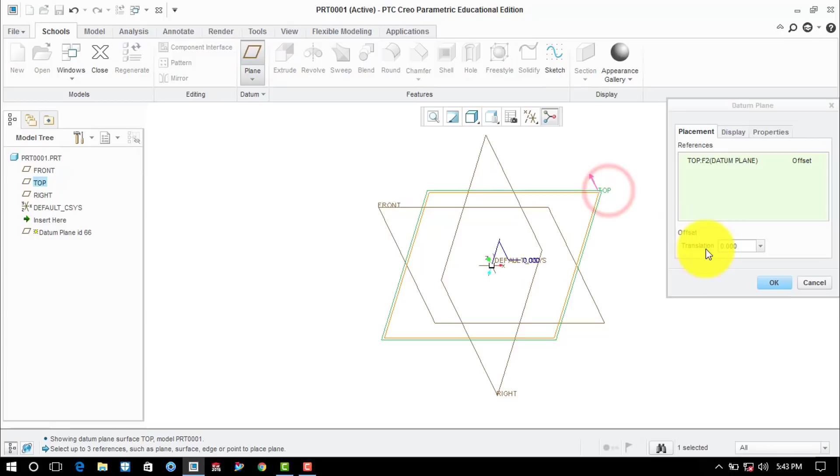Now before creating a part, we will first offset a plane parallel to the top plane and at a distance of 18 mm. So we'll go to the plane, then select the top plane and the distance is 18 mm and then click on OK. After making a plane, we'll use the extrude. So go to the model and select the extrude. Now we'll draw two concentric circles. So click on the circle and draw two concentric circles with the origin as a center.

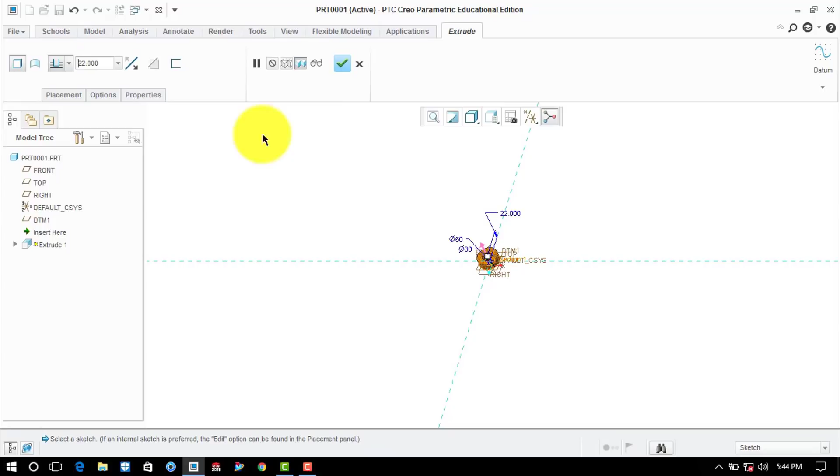And here the inner circle has a diameter of 30 mm and outer circle has a diameter of 60 mm. And then click on OK. Here the depth of the extrusion is 22 mm. So enter here 22 and then click on OK. After making this, we have to mirror it about the top plane. For that, click on the mirror and then select the top plane and then click on OK.

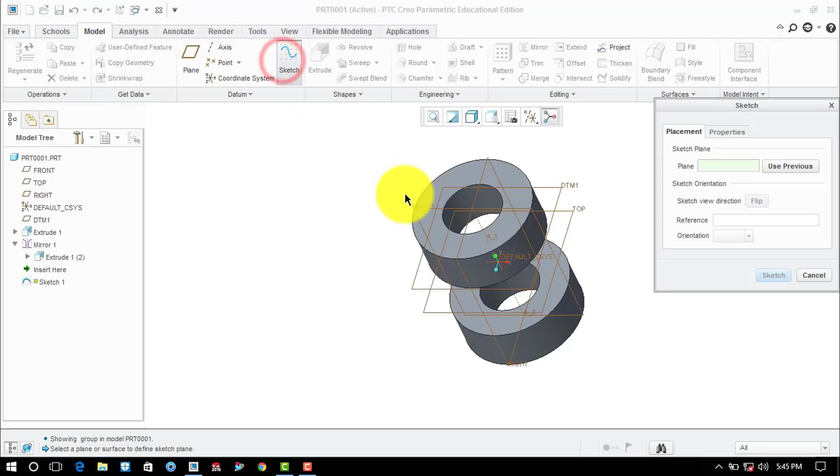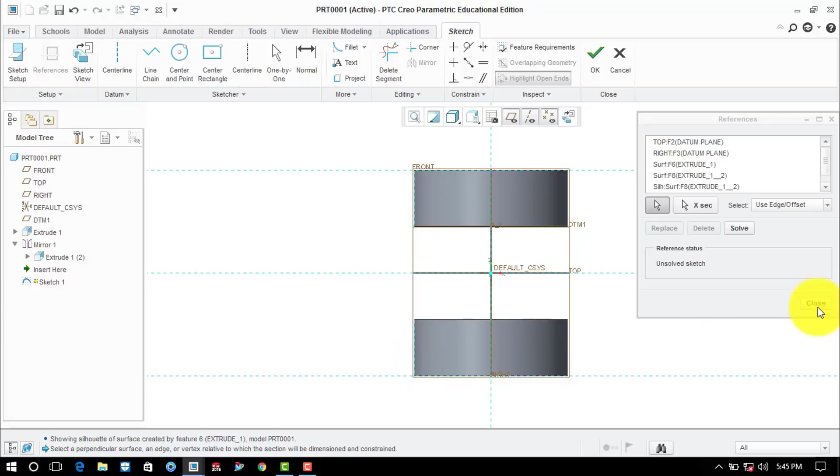After making this, we have to sketch a curve on the front plane about which we will sweep a cross section. For that, click on the sketch, then select here front plane and then sketch. Now here, before making the sketch, we will give the references to some edges. So click on the references, then click on the upper edge, then this lower edge and these two side edges. Then we will close it. Now we will make a circle such that it will be tangent to both the upper and lower reference line. So we have created this.

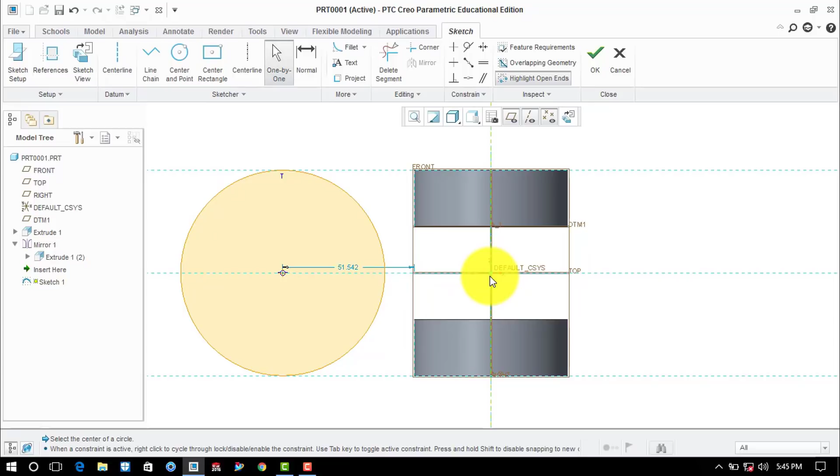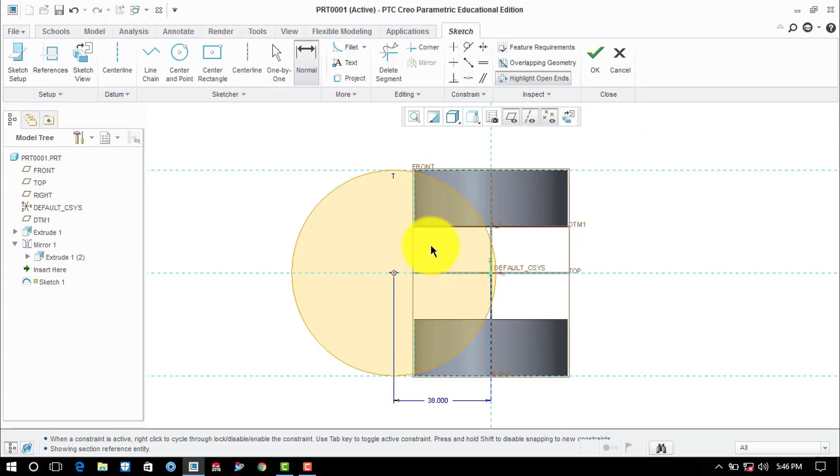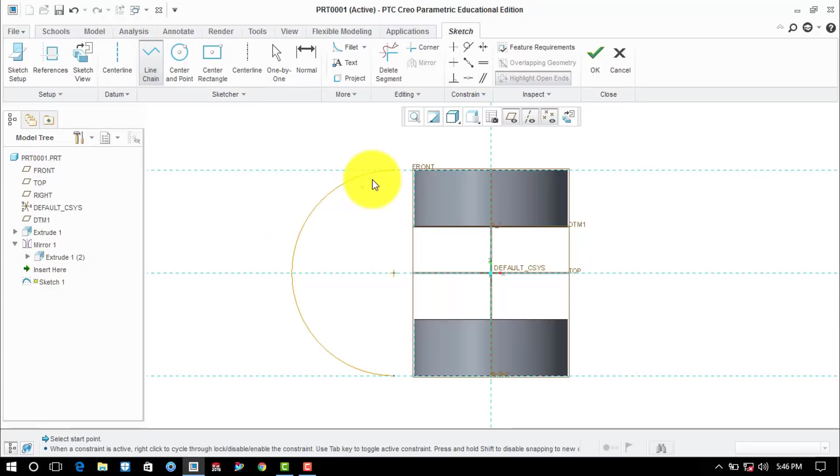Now the distance of the center of the circle from the origin is 38 mm. So we'll go to the normal, then click on the center of the circle, then press Ctrl, then click on the origin and then press the scroll button. Now this distance is 38 mm. Now after making this, we will trim unwanted segments. For that, we will use the delete segment and then we will delete all the unwanted segments. Now we will make two horizontal lines to complete the curve. For that, we will click on the line and then we will draw two horizontal lines and then we will click on OK.

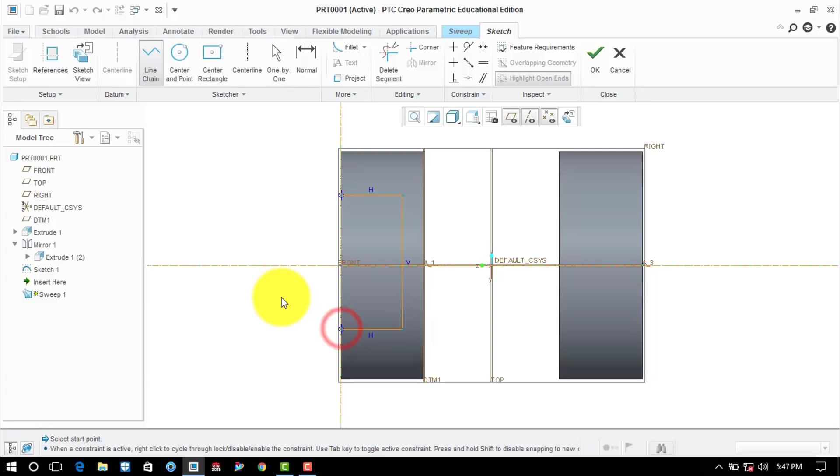Now we will click on the sweep and select the section. Now here we will draw a section which we want to sweep along the curve that we have drawn in the early sketch. So here we will draw a sketch using the line. Now here first we will draw an open rectangle. Now here this distance is 18 mm, the total distance is 36 mm and here it is 22 mm. Now we will close it by a line and then click on OK.

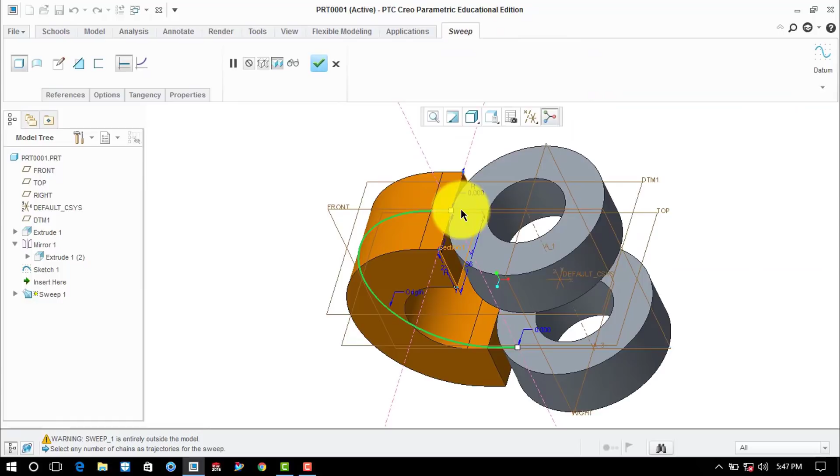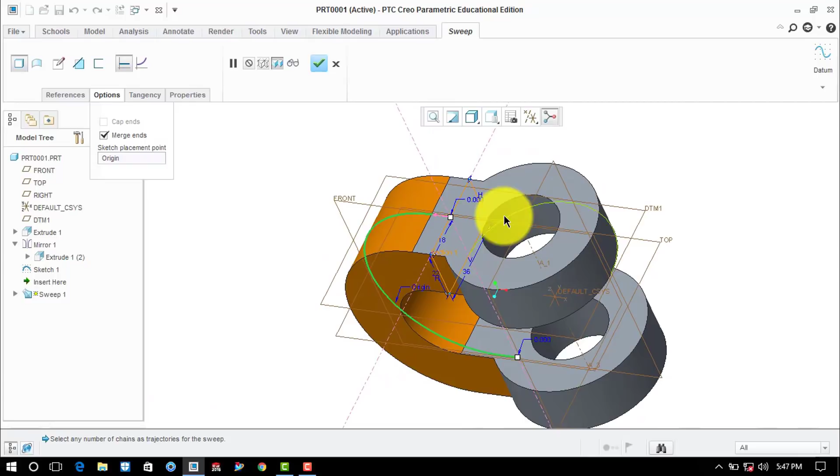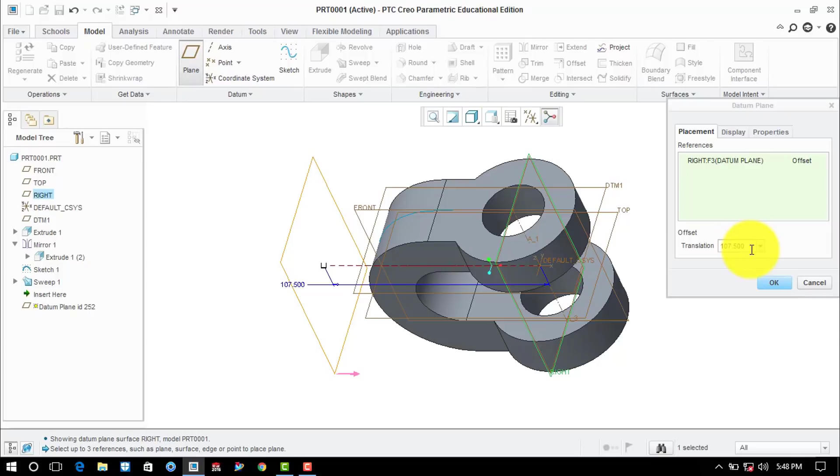So here you can see that there is some gap in between the early entity and the entity that we have made by the sweep. Now in order to remove these, we will go to the options and click on the merge ends. So here you can see that it is perfectly attached to the prior entity. Then click on OK. Now after that we will make a plane which is parallel to the right plane and at a distance of 107.5. So click on the plane, then select the right plane, and here the distance of this plane from the right plane is 107.5 mm. So enter here 107.5 and then click on OK.

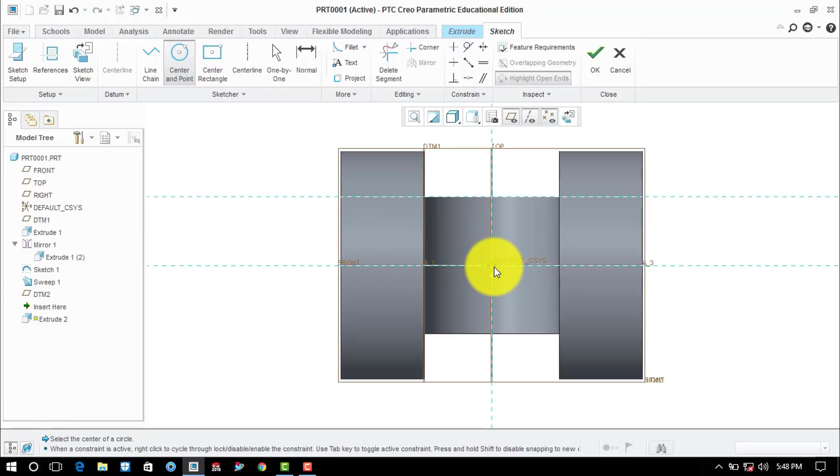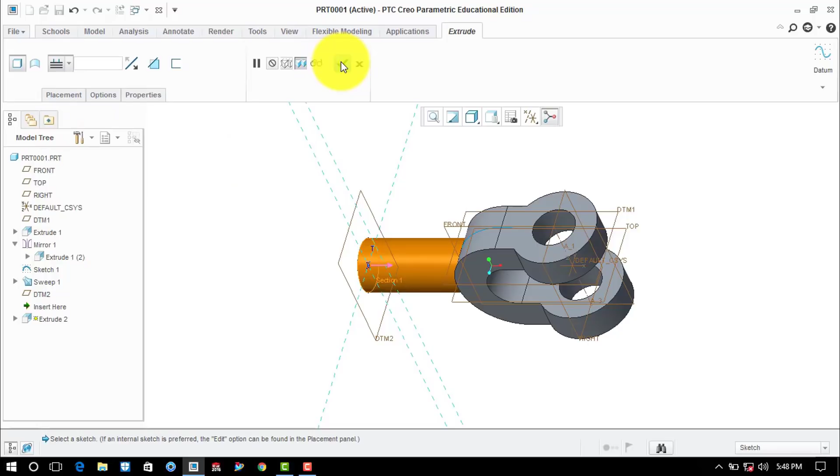After making a plane, we will select Extrude and then we will give the reference to this upper edge, then we will close it. Now we will draw a circle whose center lies on the origin and which is tangent to the reference geometry. Then we will close. Now here the depth of extrusion is up to this portion. So here in this drop down box we will select extrude up to the next surface and then we will click on OK.

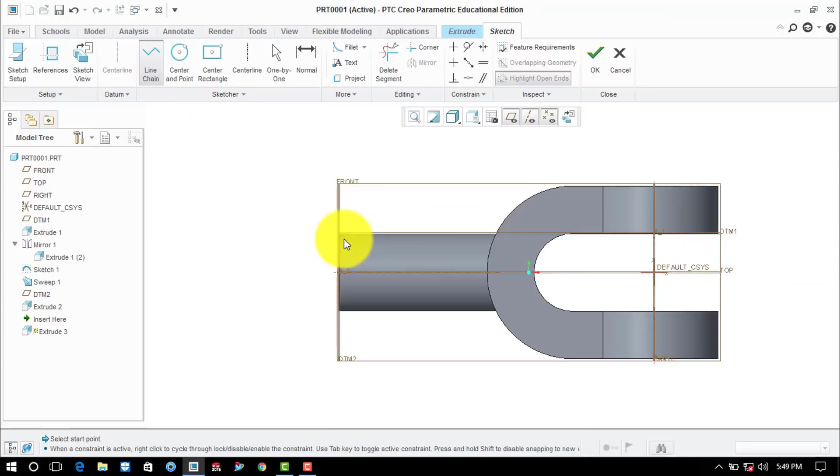Now after making this, we will click on the extrude and then we will select front plane. Now we will give the references to the upper edge and this side and then we will close it. Now we will draw a closed section using the line and circle. So first we will start from here and first we will draw a vertical line, then a horizontal line. Now the vertical line has a length of 2 mm, the horizontal line has a length of 38 mm, and now we will draw a circle.

So here we will click on the circle, then we will draw a circle. Now we will give the tangency to this circle to the horizontal line. So click on the tangency, then click on the circle and then click on the horizontal line. Here the distance of the center of the circle from the reference line is also 38 mm. So we will give it 38.

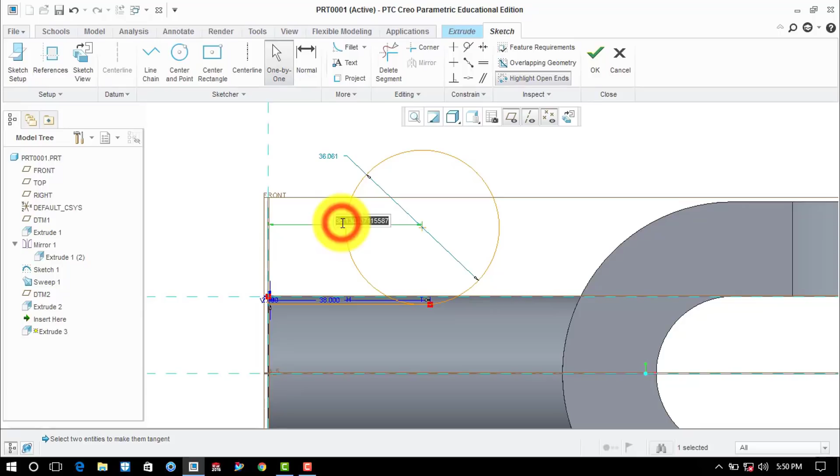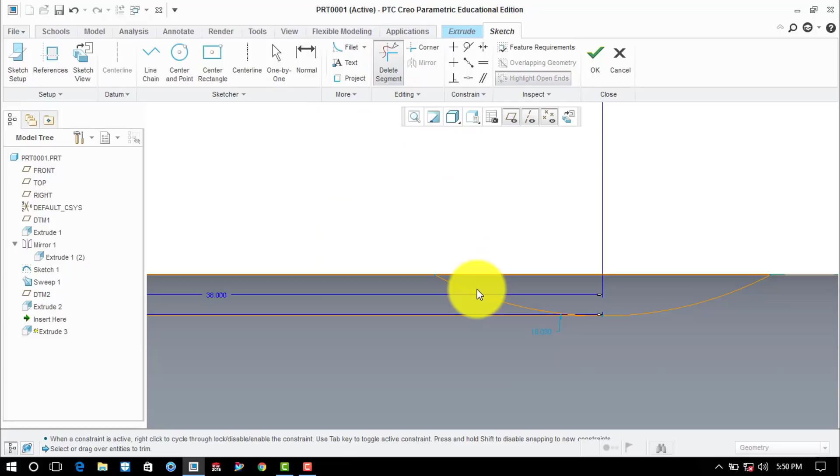Now we will draw a horizontal line in order to complete the section. So we will create a horizontal line like such. Now we will trim unwanted segments. So we will click on the delete segment and we will delete all the unwanted segments. Now here our sketch is completed and now we will click on OK.

Now here from the drop down list we have to select extrude on both the sides and then we will click on the remove material and then click on OK. Now we have to make a pattern of 6 such extrude cuts. So we will click on the pattern, then here we will select the axis pattern.

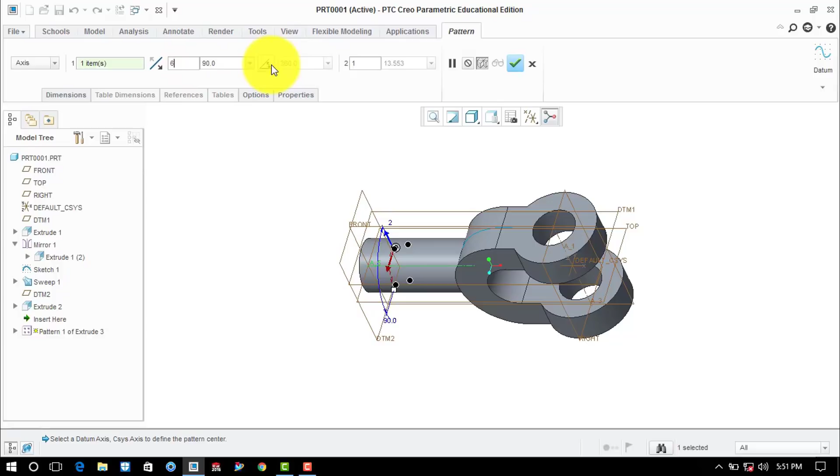Now here we have to choose the axis around which the pattern will be made. So here we will select this axis and here we have to give the number that we want to make the pattern. So here it is 6 and we will click on the 360 degree button, then click on OK. So here we have made successfully our first part, which is the fork, and now we will save it.

So go to the file, then click on the save as. Here you can see that it will be automatically saved to the folder that we have made using the working directory, which is the desktop and knuckle joint. Now here we will name it as a fork end, and then we will click on OK.

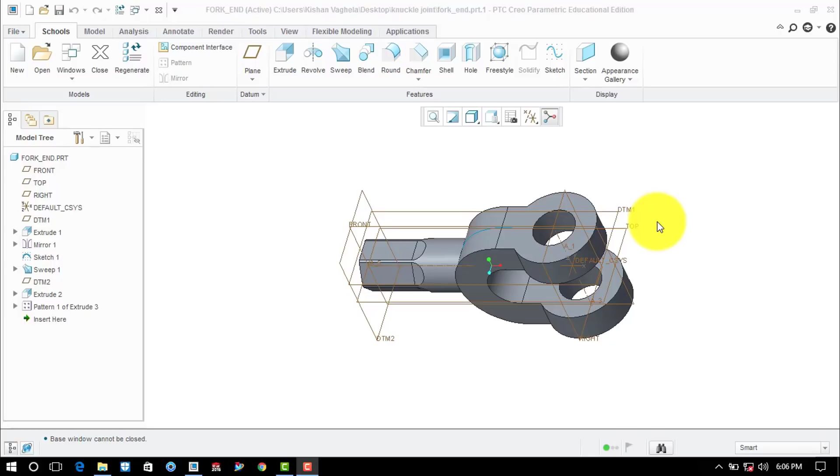Now we will close it and we will make the second part, which is the eye end. So we will close it and click on the new. Here we will uncheck this, click on OK, and here select millimeter kg second and then OK. Now first we will go to the model, then click on the extrude and select the top plane.

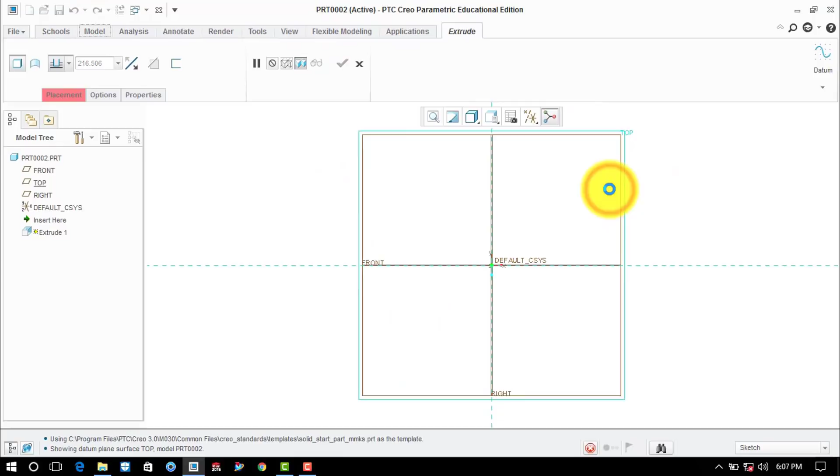Now we will create two concentric circles. So we will create two concentric circles having the diameter of 30 mm and 60 mm. So here it is 30 mm and it is 60 mm. Now we'll click on OK.

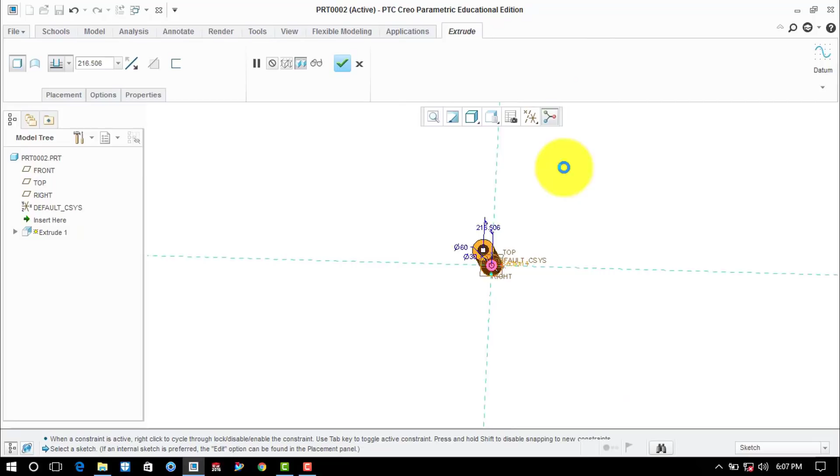Here we will extrude the two concentric circles on both sides of the sketching plane. So here in this drop down box, select extrude on both the sides, and here the depth of the extrusion is 36 mm. So enter here 36 and then click on OK.

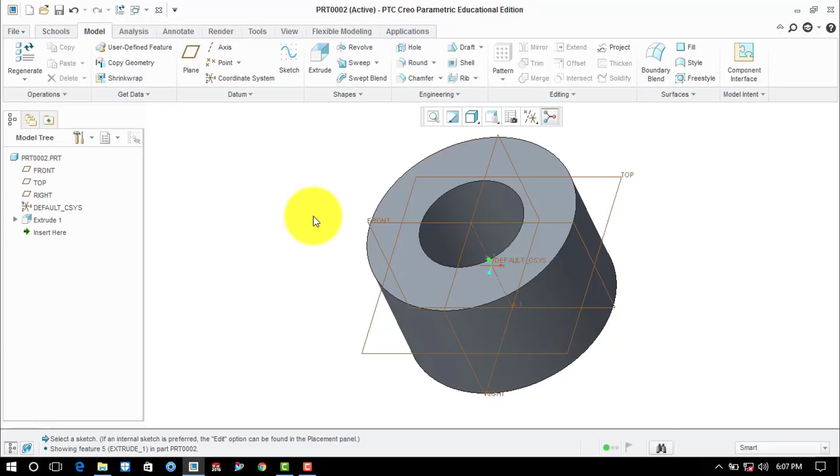After making this, we have to make a plane which is parallel to the right plane and at a distance of 120 mm. So click on the plane, then select the right plane and enter here 120 mm. And then click on OK. After creating a plane, select the plane and go to the extrude.

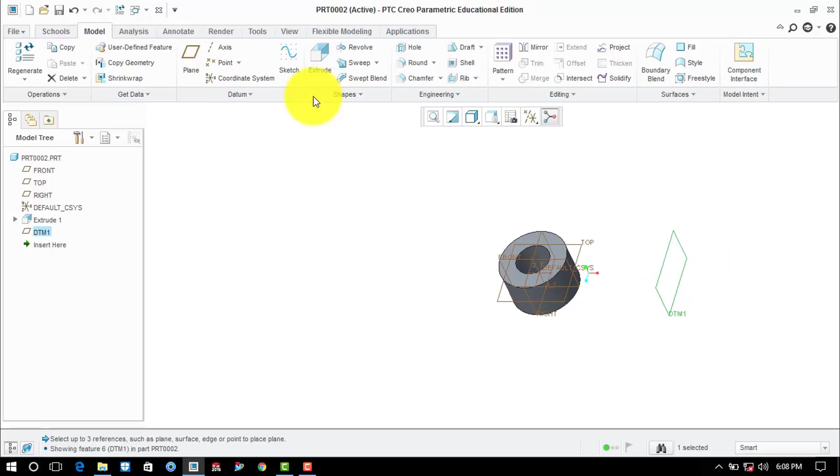Now here we will give the reference to the edge and we will close it. Now click on the circle and we will draw a circle such that its center lies on the origin and it will be tangent to this reference geometry.

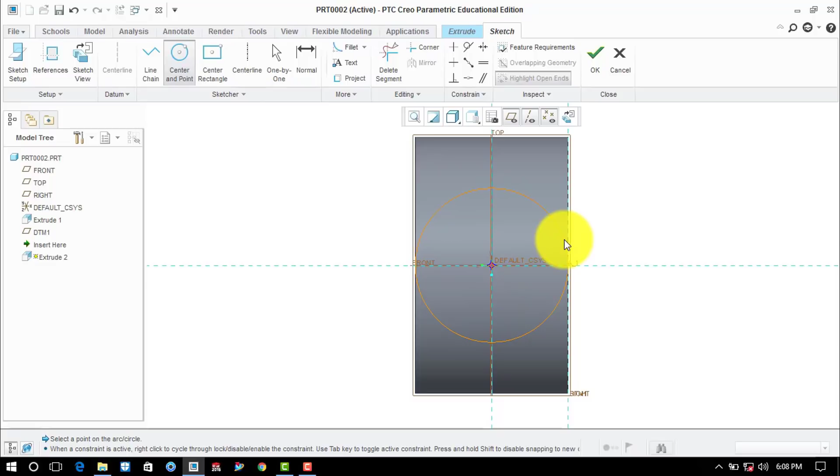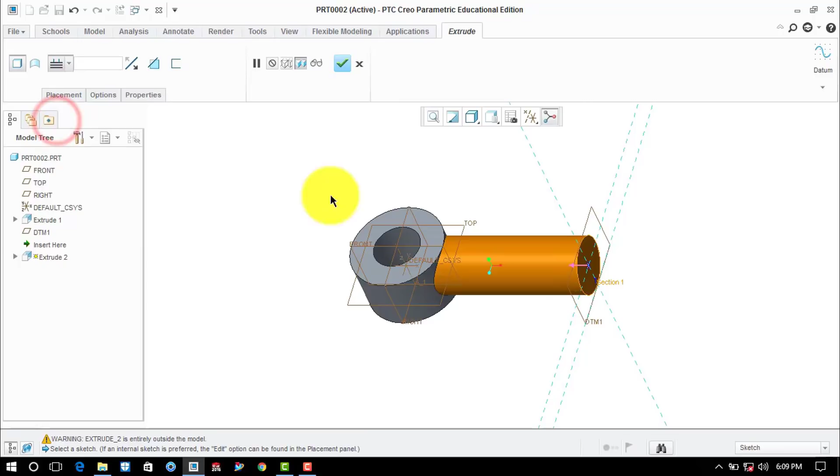Then click on OK. And here we have to alter the direction of extrusion, and here we have to extrude it up to the entity. So here in the drop down box, select extrude up to the next surface and then click on OK. Now after making this, we have to extrude cut.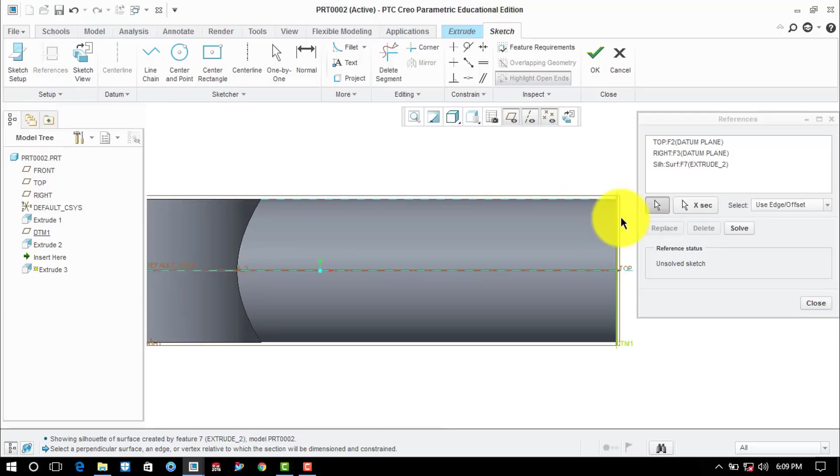So we'll go to the extrude, then select the front plane. Now here we will select this upper horizontal edge and this side edge. So go to the references, then we'll select this and this edge and we'll close it. Now we will make a section.

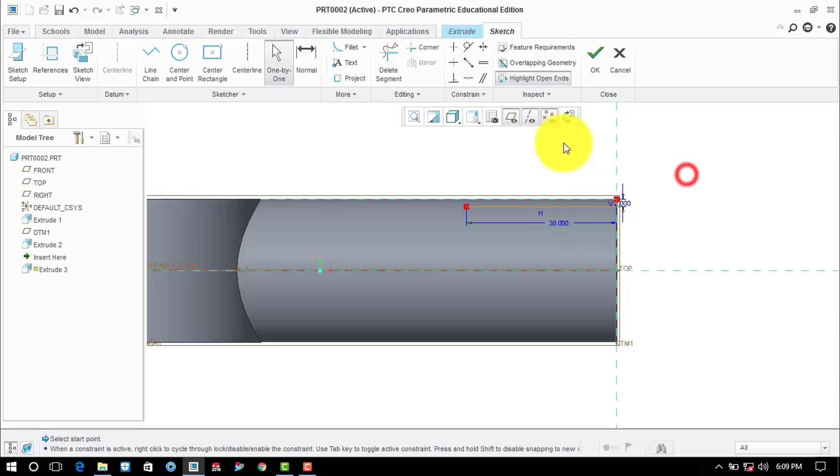So we'll use the line, then draw a vertical line and then a horizontal line. Now the vertical line has the length of 2 mm, the horizontal line has the length of 38 mm. Now we will draw a circle. So here we will choose the circle and draw a circle.

Now we will give the tangency to this circle to the horizontal line. For that, click on the tangency, then click on the circle and then click on the horizontal line. Now here the distance of the center of the circle from this vertical reference line is also 38 mm.

So enter here 38, and now we will close the section by a horizontal line. So we will go to the line and then we will close the section. Now we will delete the unwanted segments. Before that, we will give the diameter of this circle, which is 30. So here we will enter 30 mm.

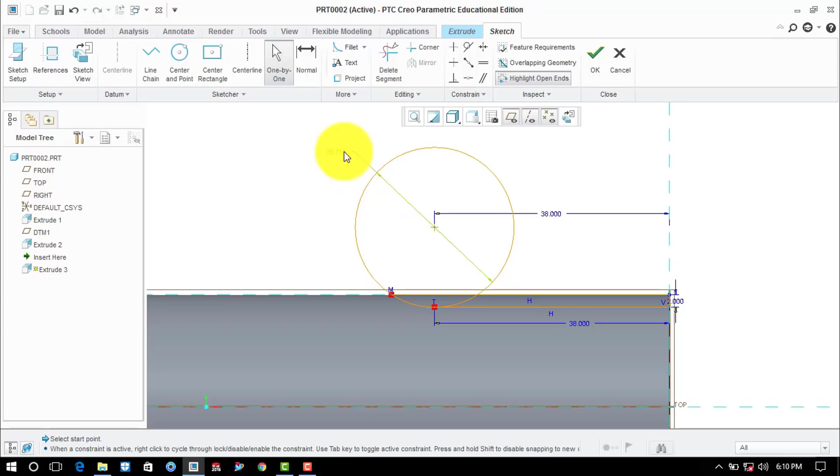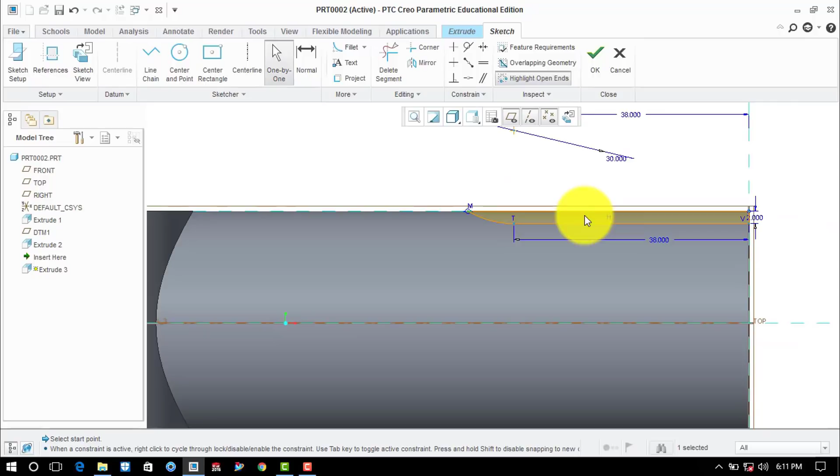Now we will delete the unwanted segments. So click on the delete segment and here we will delete all these unwanted segments, and here we will extend it. So here it is like this. So here our section is completed. Now we will click on OK.

After that, here we have to choose the extrude on both the sides, and here we will click on the remove material, then click on OK.

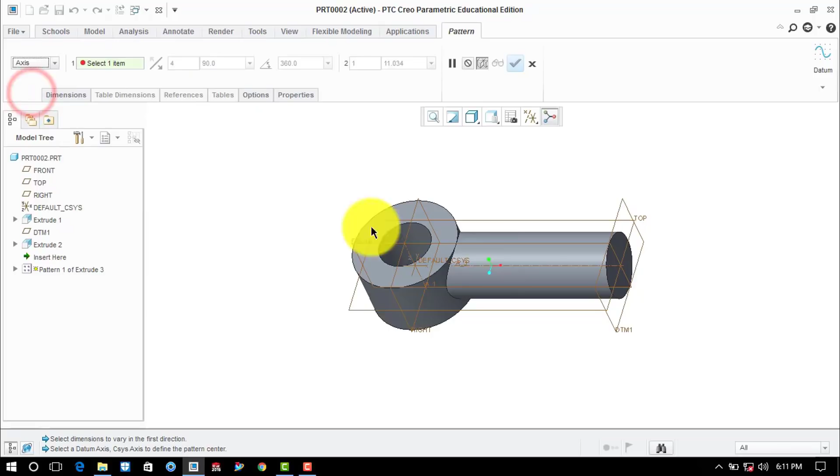Now we have to make a pattern of such extrude cut 6 times. For that, we will go to the pattern. Here we will select the axis pattern, and now we will select the axis for making the pattern. For that, select this axis. Here we want 6 such extrude cuts, so enter here 6 and click on the angle button. Now click on OK. So you can see that we have made the second major part of the eye end.

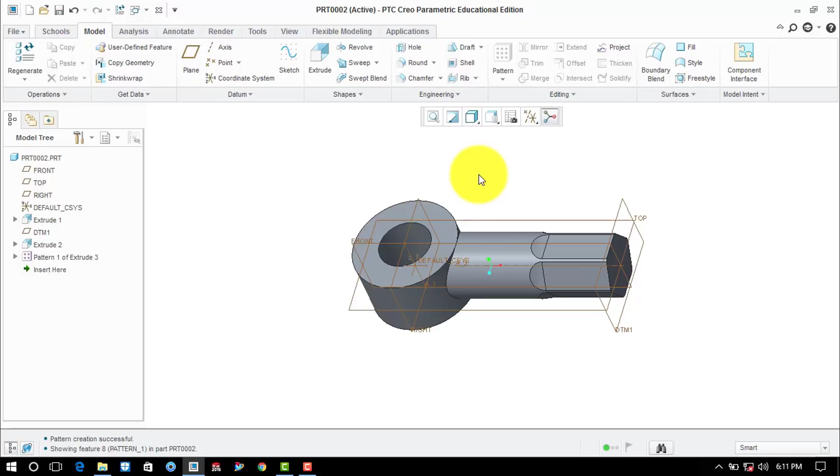Now before closing it, we will put another plane which is parallel to the right plane at a distance of 26 mm, which we will use while making the assembly. So go to the plane, then click on the right plane, and here we will make a plane at a distance of 26 mm and then click on OK.

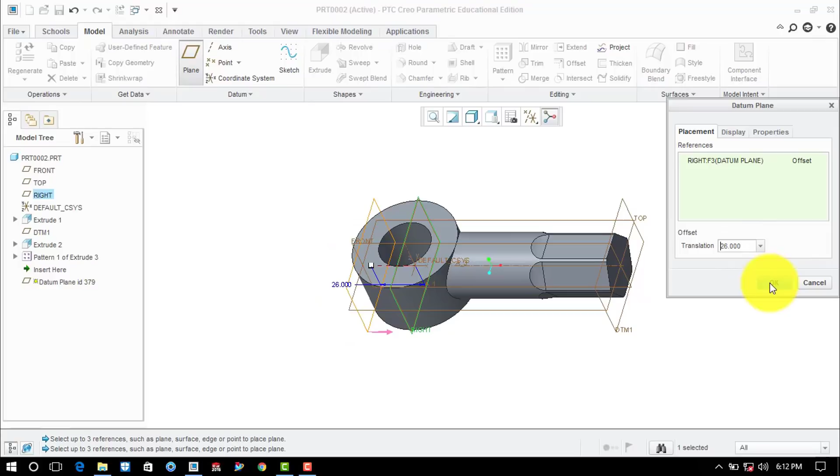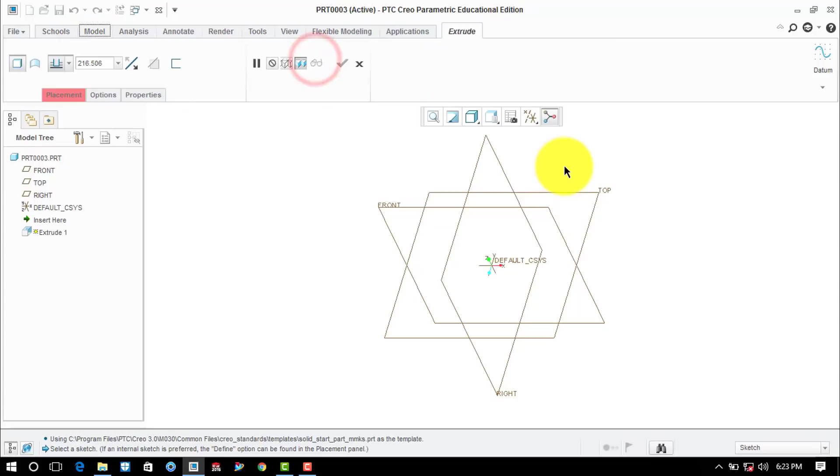Now it is a very simple part. For that we'll go to the model, then click on the extrude. Now select the top plane. Here first we'll make a circle of diameter 45 mm and then click on OK. We will extrude it up to the depth of 15 mm, so enter here 15 and then click on OK.

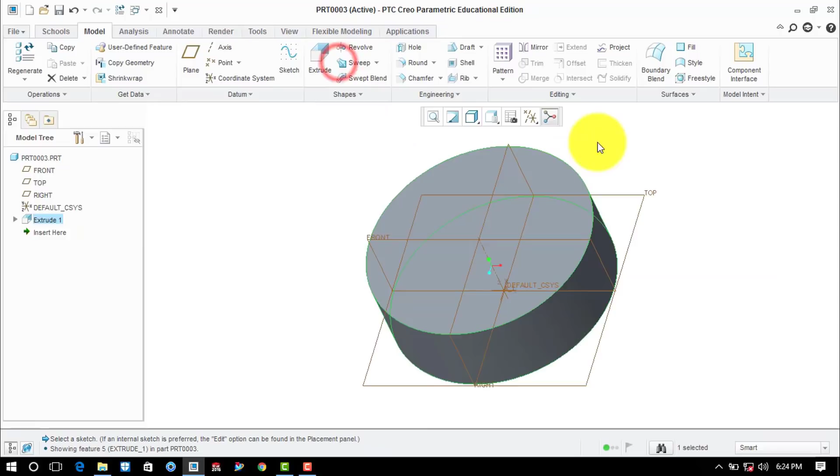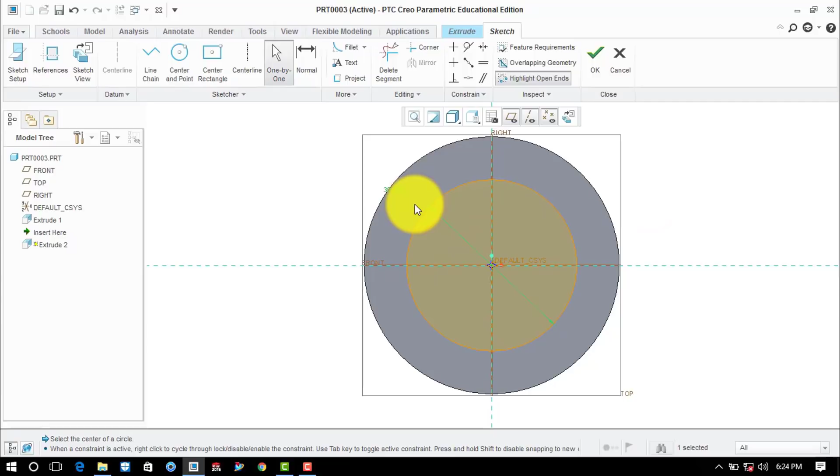After making the head of the pin, we will make a shank. For that we will also go to the extrude, then select this lower face. Now here we will draw a circle with the diameter of 30 mm, so it is 30 mm, and now we will click OK. Now the depth of extrusion for the shank portion is 102 mm, so we will enter here 102 and then click on OK.

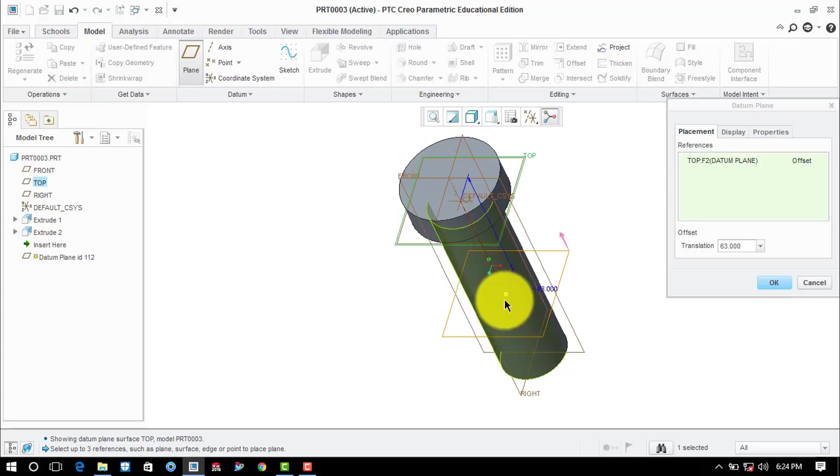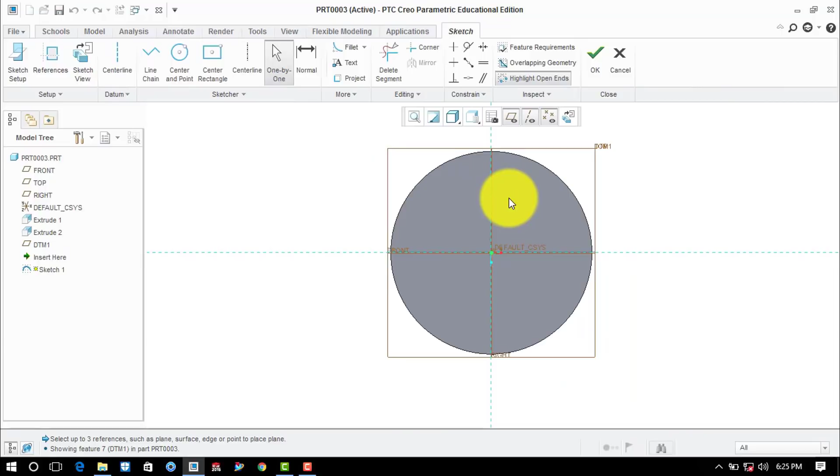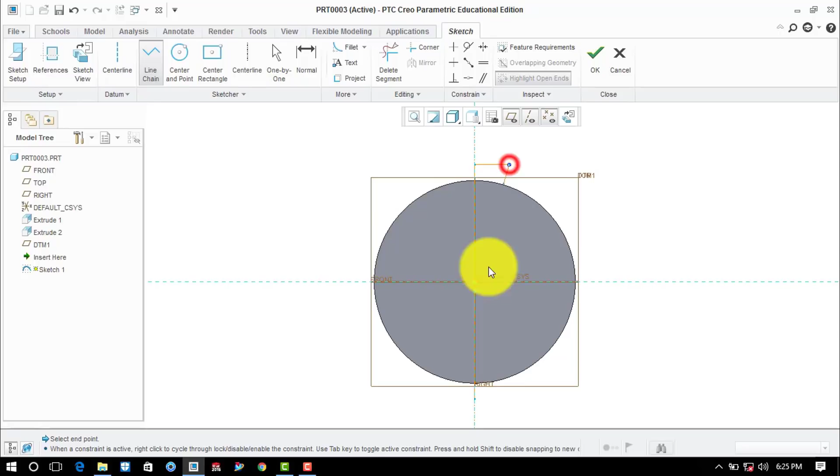Now in order to make a revolve, first we will insert a center line, so click on the center line and here we will put a center line. After making a center line, first we will draw a vertical line. Now the length of the line is 52 mm, so we will enter here 52, and we will enter here half of 52, which is 26. Then we will go to the line, draw a horizontal line, then an inclined line, and then a horizontal line.

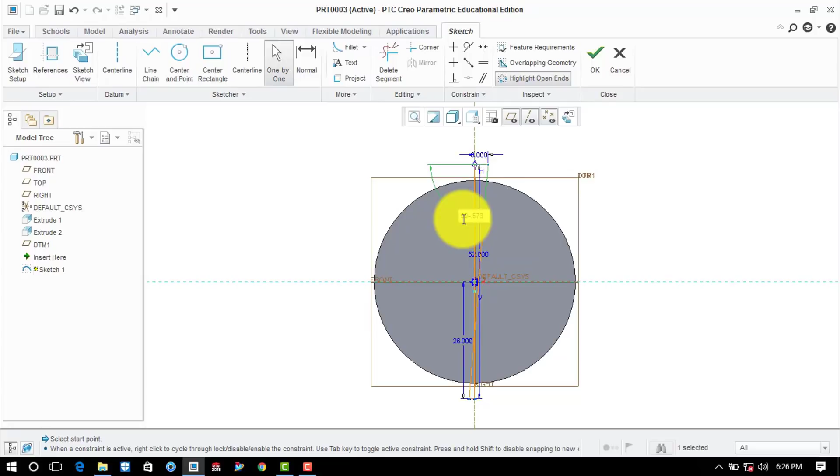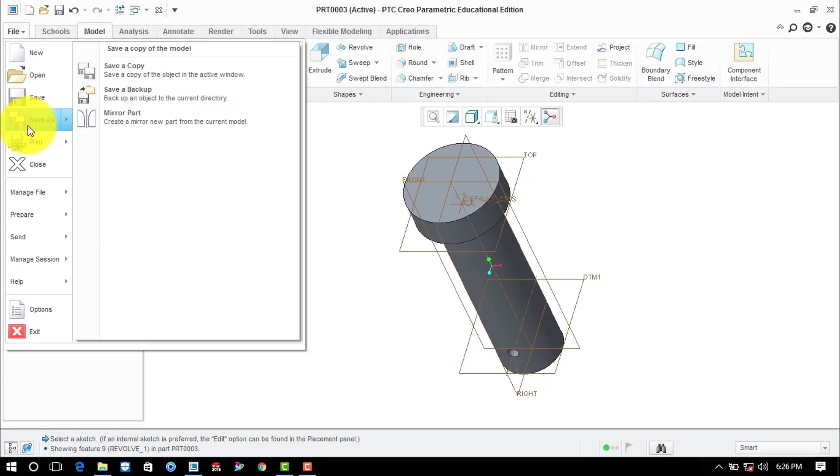Now here the length of the horizontal line is 3 mm, so we will enter here 3, and after that we will give the angle. This angle is nothing but 90 minus 0.573. Now we will click on OK. Now we will go to the revolve and select the remove material, then click on OK. So now we have made the pin. Now we will save it, so click on the file, then save as, name it pin, and then OK.

Now the next part is the collar, so we'll close it and we'll click on the new. We'll uncheck this, click on OK. Here select the millimeter kg second and then OK. Now for making a collar, we'll mainly use the extrude and revolve features. So we'll go to the model, then click on the extrude, then select the top plane.

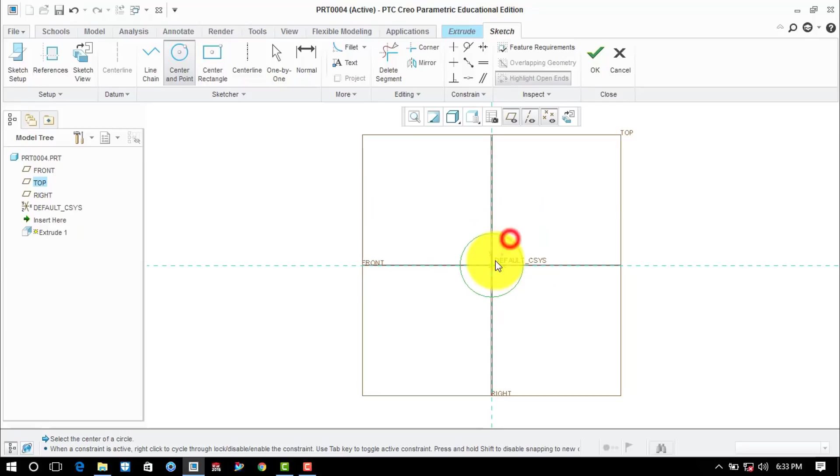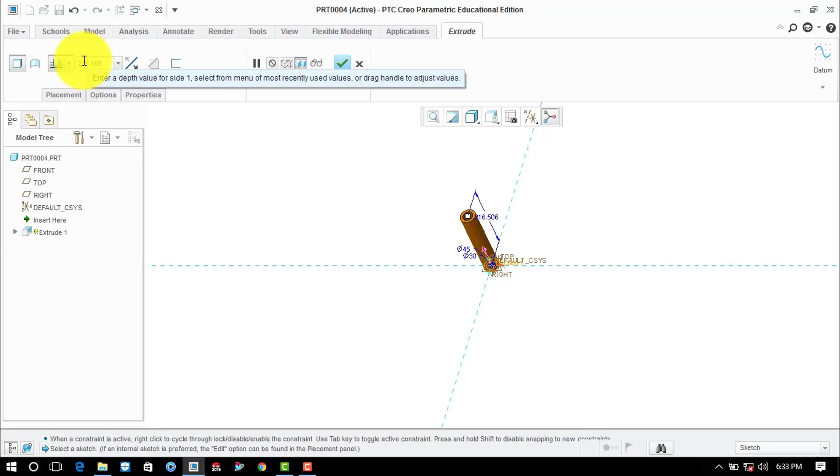Now we'll draw two concentric circles having the diameters of 30 mm and 45 mm. So enter here 30 mm, and the bigger circle has the diameter of 45 mm. Then click on OK. Now here we'll extrude these two concentric circles on both sides of the sketching plane. So in this drop down menu, select extrude on both sides. Now the depth of the extrusion is 14 mm, so we'll enter here 14 mm, then click on OK.

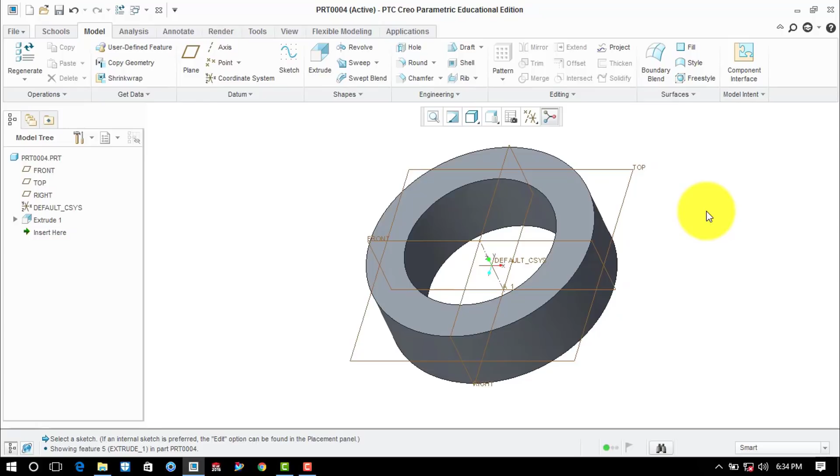After making this, we will make a slot for the tapered pin. For that, we'll click on the sketch, then we'll select the front plane and then we'll go to the sketch. Now here we will use the revolve feature in order to make a slot for the tapered pin. For that, we will first insert a center line.

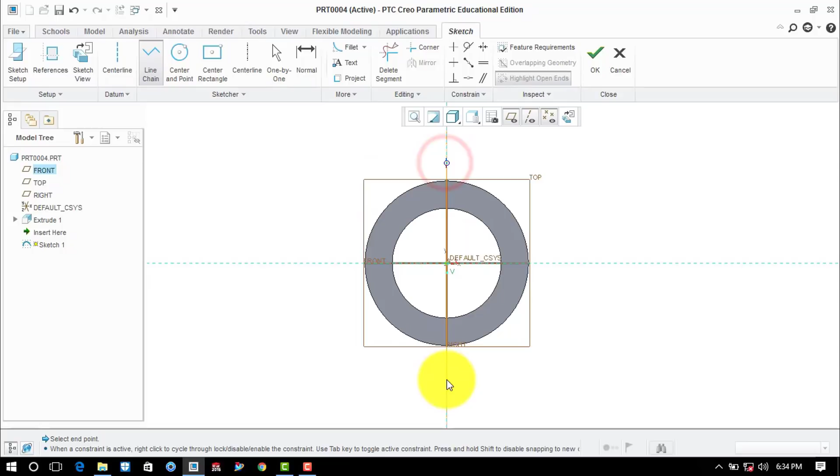After putting a center line, we will draw a closed section for making a slot. For that, we will go to the line and make a vertical line. The length of the vertical line is 52 mm, and half of 52 is 26.

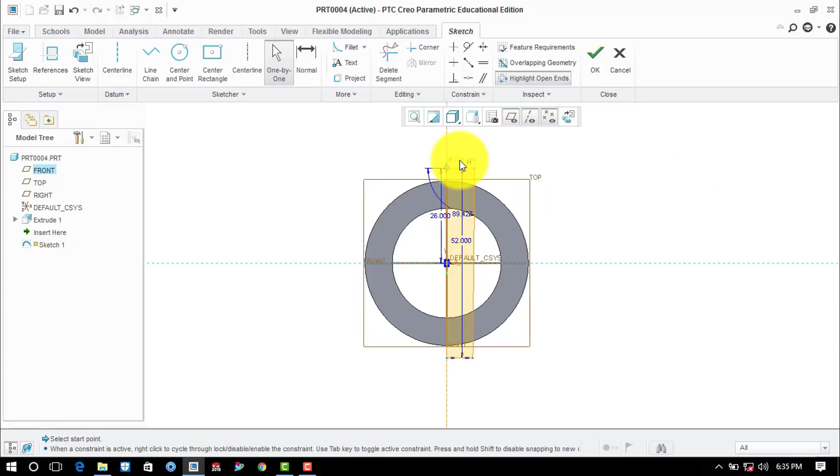Now we will draw a horizontal line, then an inclined line, then another horizontal line, and close the section. The angle here is 90 minus 0.573, and the length of this horizontal line is 3 mm. Enter 3 and then close it.

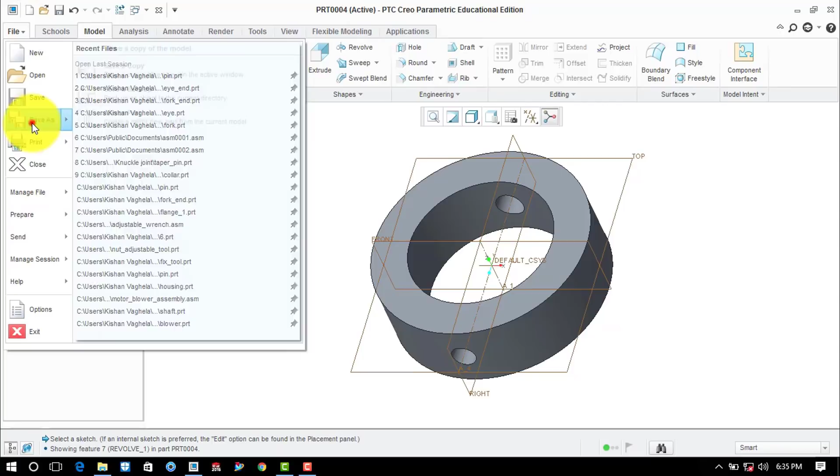Now we'll go to revolve and click on remove material, then click OK. Now we'll save this, go to file, save as, and name it collar, then click OK.

Now we'll make the last part of the knuckle joint assembly, which is the tapered pin. We'll close this and open a new file, uncheck this, click OK, select millimeter kg second, and then OK.

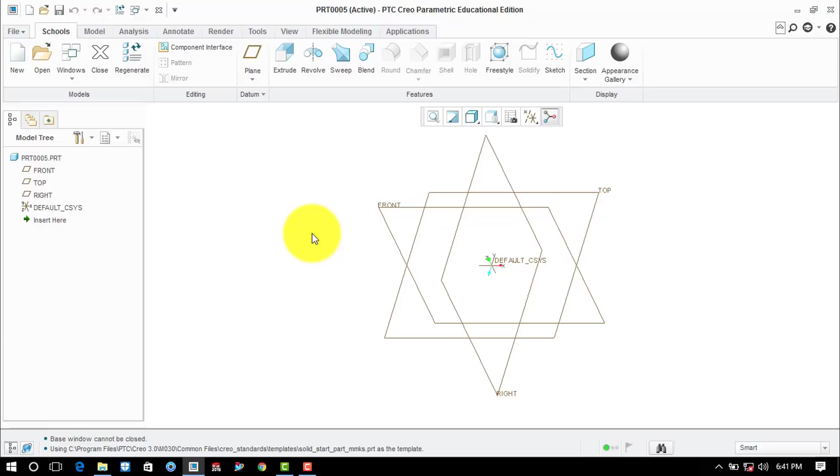Now for making a tapered pin, we'll mainly use the revolve feature. We'll go to model, click on sketch, select the top plane, then sketch. For making a revolve feature, we'll first put a center line by clicking on center line. After that, we'll draw a section for revolving it about the center line.

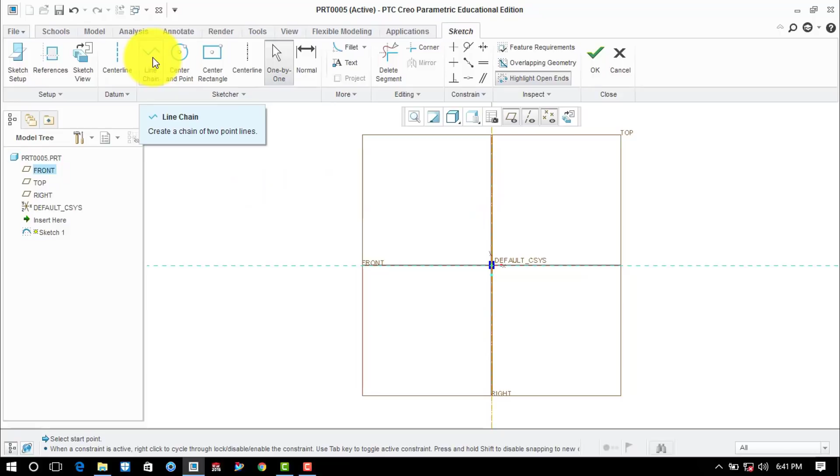Click on the line and first draw a vertical line. The dimensions of the vertical line are 52, and it is 26.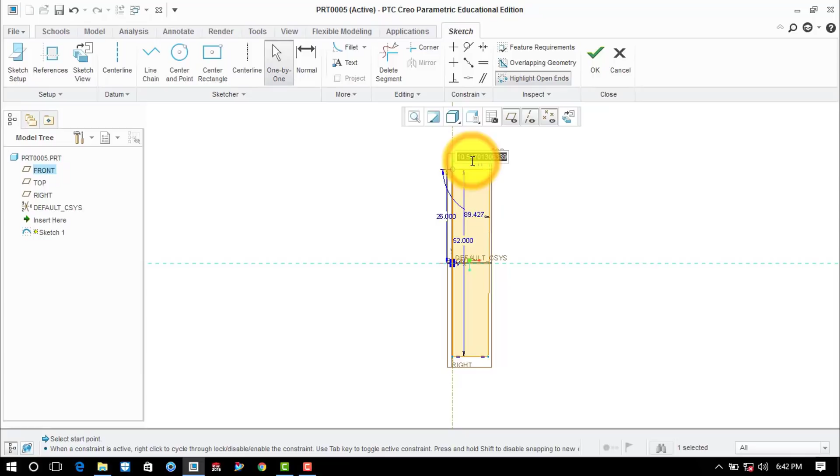Now we'll close it and click on revolve, then OK. So here it is the last part of the tapered pin, and then we'll save it. We'll go to file, save as, name it tapered pin, then OK. Till now we have created all the parts of the knuckle joint assembly.

Now we are going to make an assembly. For that, we will close this and click on new, select assembly, uncheck this, then OK. Select millimeter kg second and then OK.

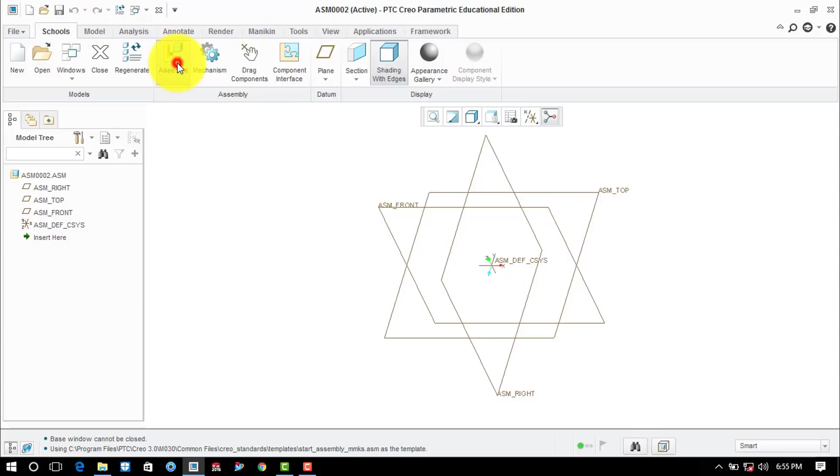Now we will insert one by one all the components and make the assembly. We'll click on assemble, first insert the fork end, and click on open. We have to left click once, then in this drop down box select default, and click OK.

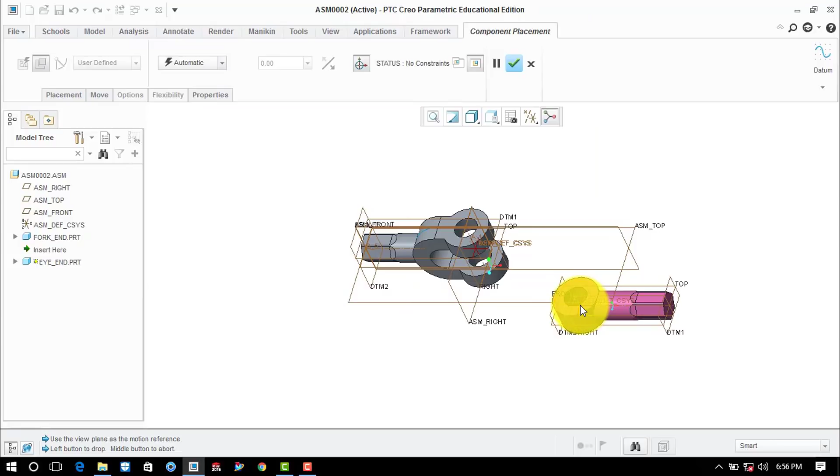Now we will insert the second component, which is the eye end. Click on assemble, then click on eye end, then open. Click the left button once. After that, we will select the inner cylindrical portion here and the inner cylindrical portion there, so both portions are coincident.

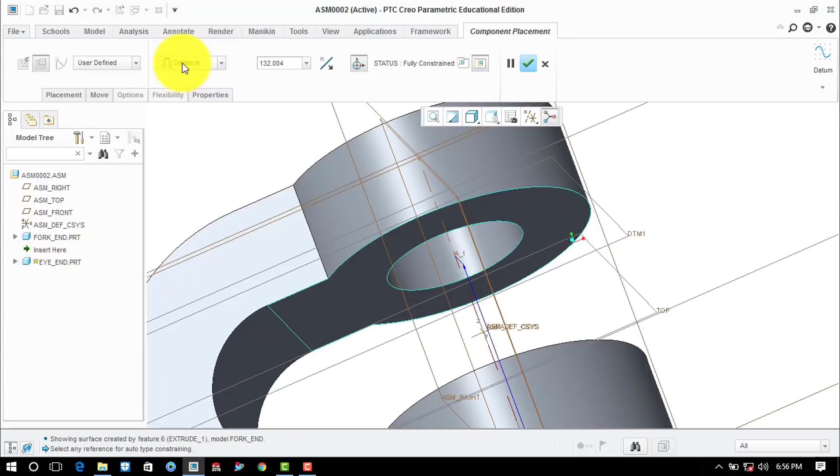After that we will select this upper face and this face, and choose coincident. Then click OK. So here we have assembled two components.

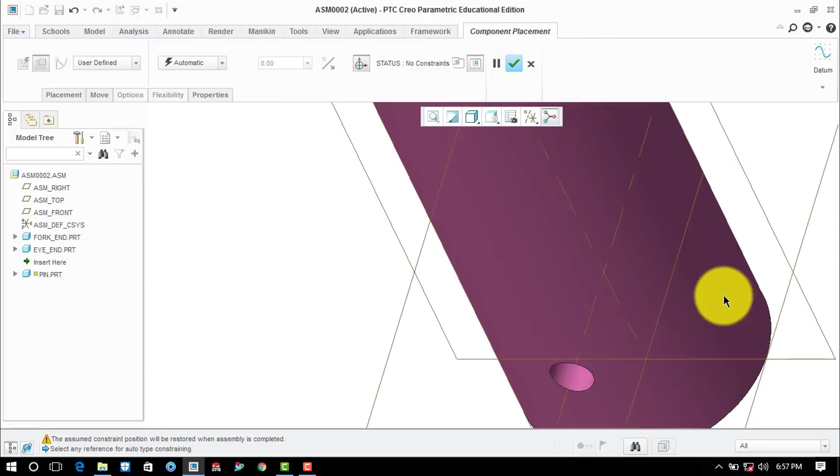Now we will insert the third component, which is the pin. We click on assemble, select the pin, click open, and first left click once. After that we select this cylindrical portion of the shank and select this inner cylindrical portion.

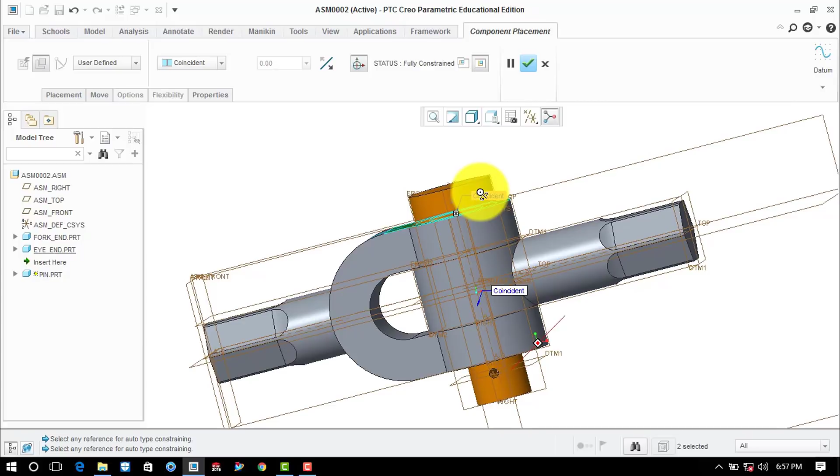Now we will select this upper surface and this lower surface of the head, and select coincident. So here you can see that we have made this coincident. Now we have to make sure that this hole is in front of us. Now we'll click OK.

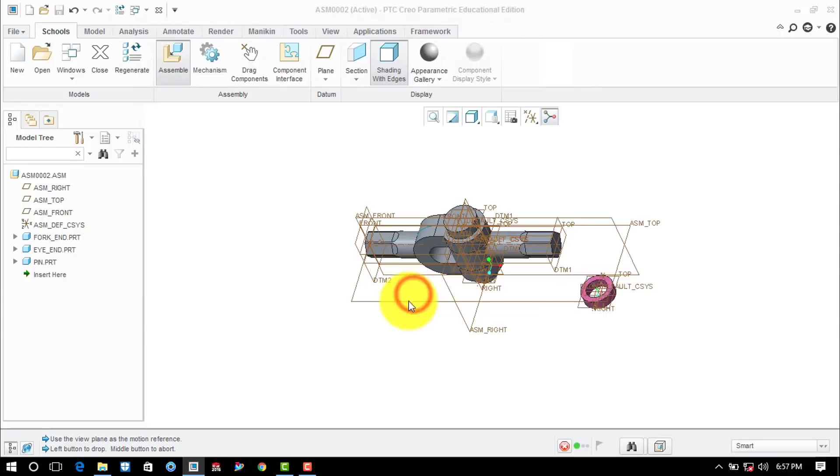Now we'll insert the third component, which is the collar. We click on assemble, select collar, click open, and left click once. Now we'll select this inner cylinder and select this cylindrical portion of the shank.

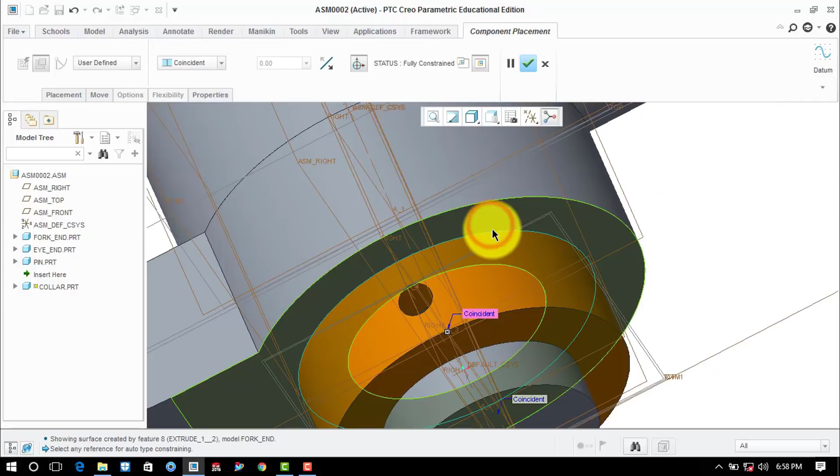Now it is coincident. After that we'll select this upper surface of the collar and this lower surface of the fork end, so it is automatically coincident. Then we'll click OK.

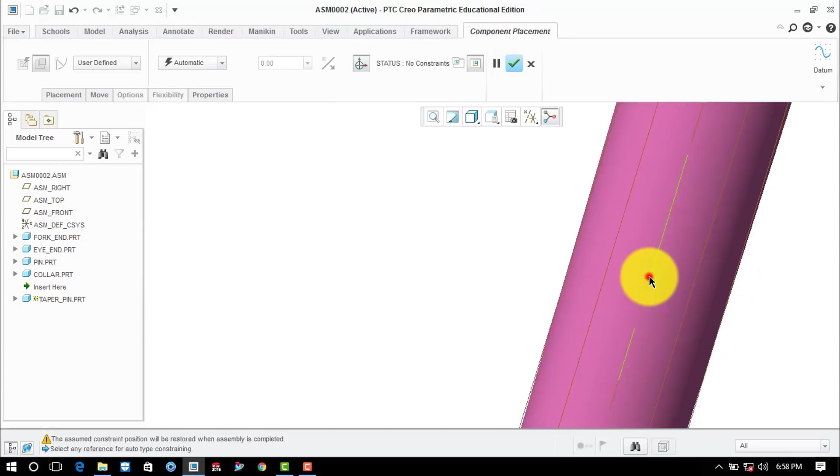Now we'll insert the last component of the assembly, which is the tapered pin. We click on assemble, click on taper pin, then OK, and left click once. Now we'll select the axis of the taper pin and then select the axis of the tapered hole, and give it coincident.

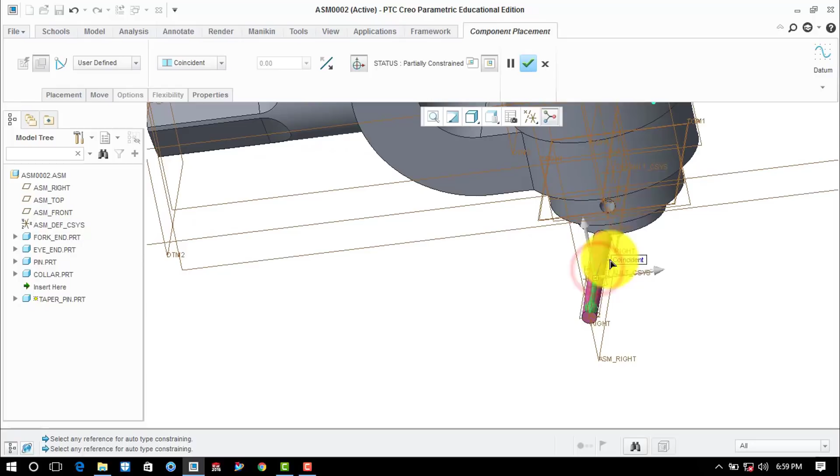Now we will check whether it is correct or not. You can see that this side hole is small. So in the placement tab we will flip, then select this right plane or front plane, and select the front plane of the assembly, give it coincident, and click OK.

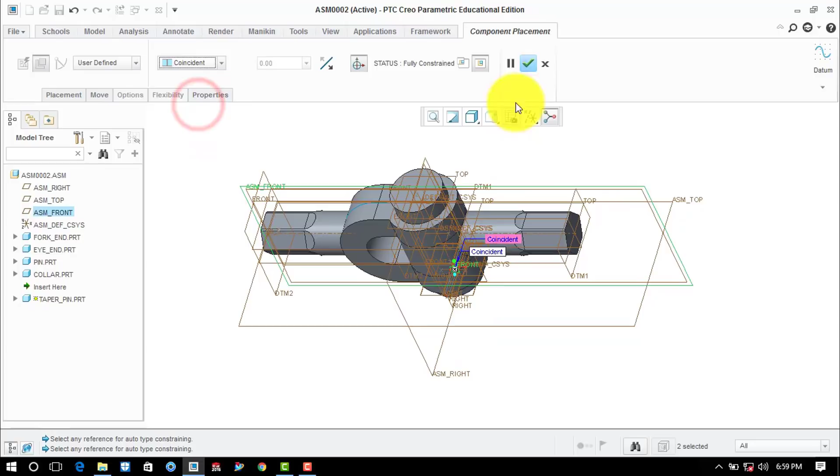Now we will hide all the planes, axis, and points, and now you can see the complete assembly of the knuckle joint.